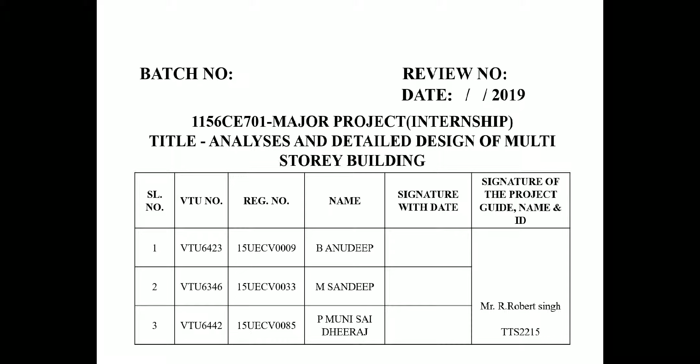The name of the project is Analysis and Detailed Design of Multi-Storey Building. The students are B Anudeep, M Sandeep, Muni Sai Dheeraj.

This is the abstract. The performance of a multi-story framed building during sturdy earthquake motions depends on the distribution of mass, stiffness, and strength in both the horizontal and vertical planes of the building. In multi-storied framed buildings, damage from earthquake ground motion generally initiates at locations of structural weaknesses present in the lateral load resisting frames.

In some cases, these weaknesses may be produced by discontinuities in stiffness, strength, or mass between adjoining stories. Such discontinuities between stories are often allied with sudden variation in the frame geometry along the height. A common type of discontinuity is vertical geometrical irregularity arising from the rapid drop of the height.

This work shows the performance and behavior of regular and vertical geometric irregular RCC framed structure under seismic motion. 5 types of building geometry are taken in this project: 1 regular frame and 4 irregular frames. A comparative study is made between all these building configurations, height-wise and bay-wise.

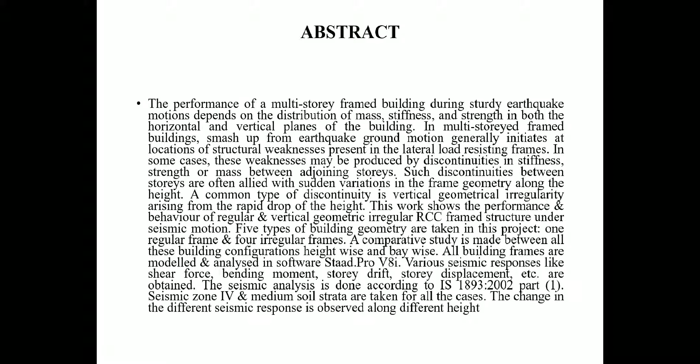All the building frames are modeled and analyzed in software StaadPro. Various seismic responses like shear force, bending moment, story drift, story displacement, etc. are obtained. The seismic analysis is done according to IS 1893-2002 Part 1. Seismic zone 4 and medium soil strata are taken for all the cases. The change in the different seismic response is observed along the different height.

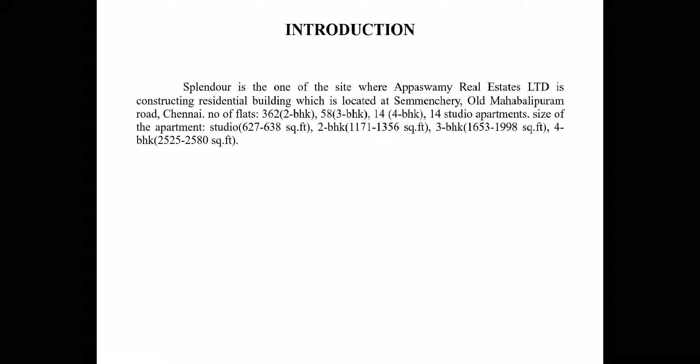Introduction. Splendour is one of the sites where Appaswamy Real Estates is constructing a residential building which is located at Semmenchery, OMR, Chennai.

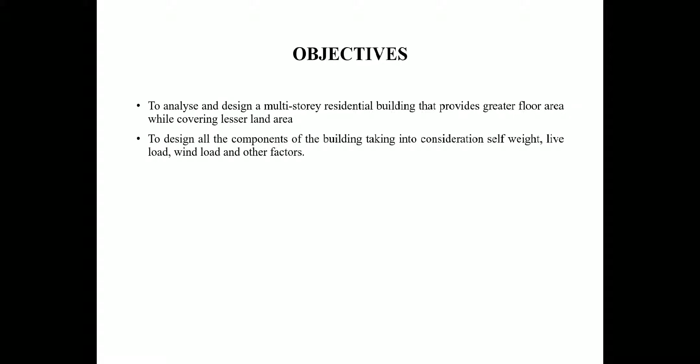Objectives of this project are to analyze and design a multi-story residential building that provides a greater floor area while covering lesser land area, and to design all the components of the building taking into consideration self-weight, live load, wind load and other factors. This is the methodology.

The methodology is as follows: drawing of a plan, load calculations, analysis of the building, design of the building, results and discussions, and finally conclusion.

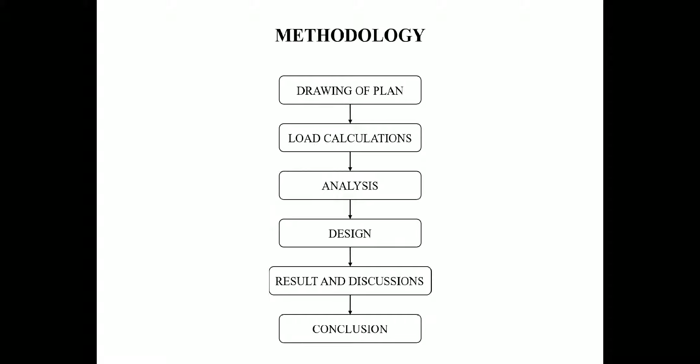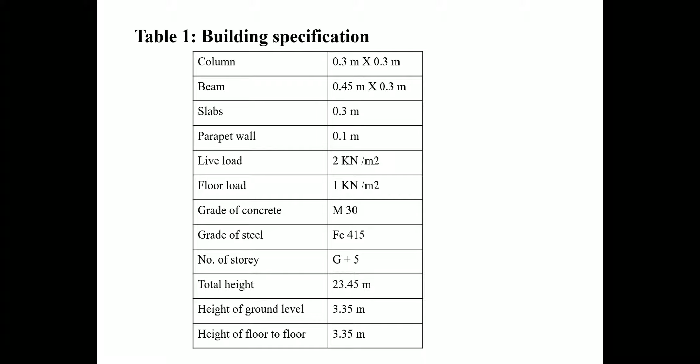These are the building specifications, which include the specifications of column, beam, slabs, parapet wall, live load, floor load, grade of concrete, grade of steel, number of stories, total height, height of ground level, and height of floor to floor.

This is the wind load calculation that we have done. The wind load calculation is based on IS 875 Part 3, 1987.

This has been calculated for a G+5 residential building located in Kandanchavadi, OMR, Chennai. These are the 3 factors: K1, the probability factor; K2, terrain height and structure size factor; and K3, the topography factor.

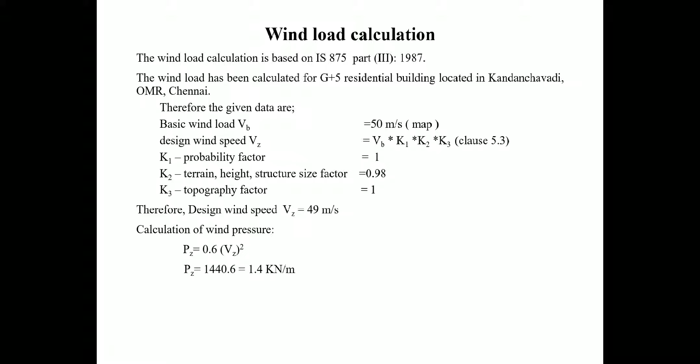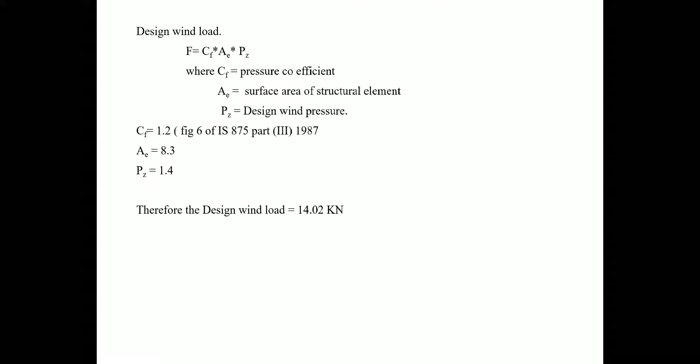Therefore, after calculating, we found that the design wind load is 14.02 kilonewton. Next, we come to the analysis.

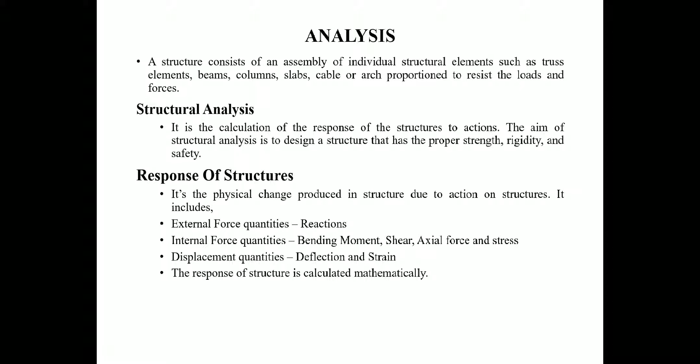These are the live loads acting. The primary loads are divided into live loads and dead loads.

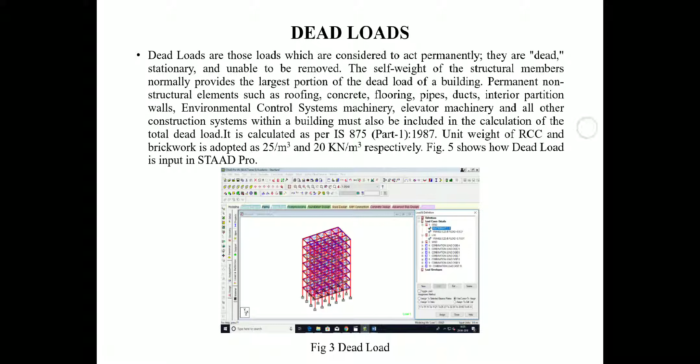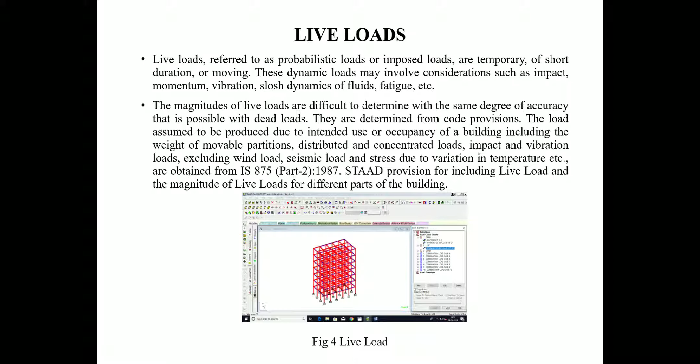Live load, referred to as probabilistic loads or imposed loads, are temporary, of short duration, or moving. These dynamic loads may involve considerations such as impact, momentum, vibration, slosh dynamics of fluids, fatigue, etc. The image represented here is of a live load in STAAD Pro.

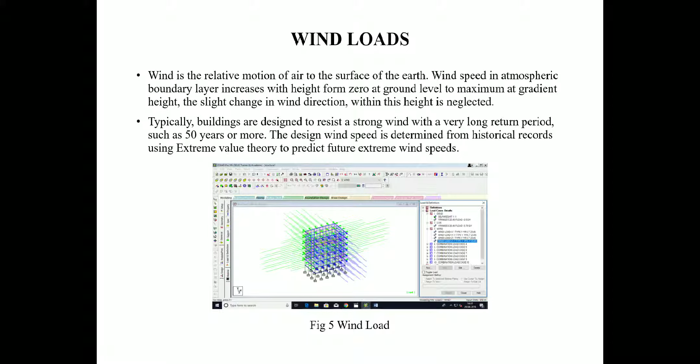Wind load is the relative motion of air to the surface of the earth. Wind speed in the atmospheric boundary layer increases with height from 0 at ground level to maximum at gradient height. A slight change in the wind direction within the height is neglected. The mentioned figure belongs to the wind load, which is represented in the STAAD Pro analysis program.

Next is the design of slab. We have designed the slab manually.

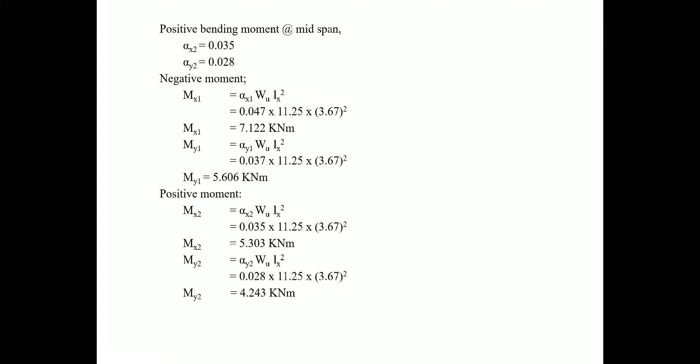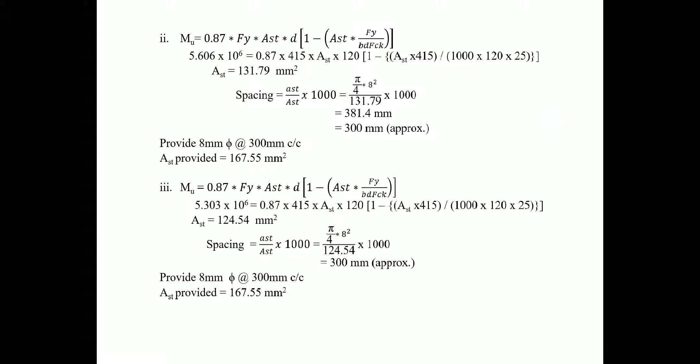Thus, here we can find that the design of slab is safe.

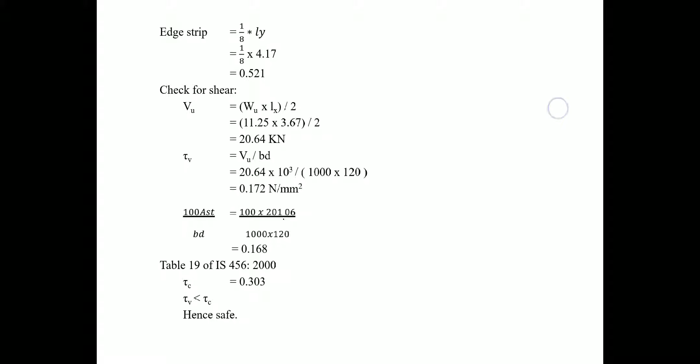Next is followed by the design of beam. Here is the given data.

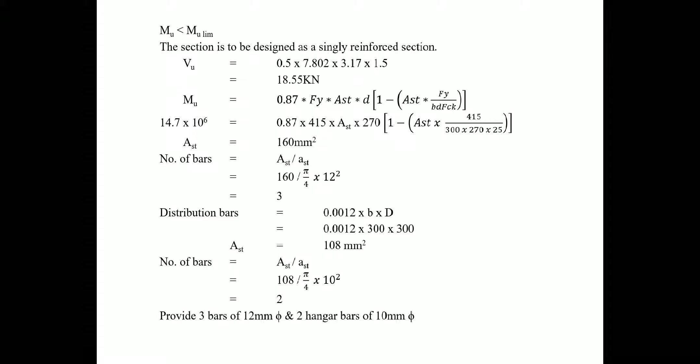Thus, from this, we can adopt nominal shear reinforcement using 8 mm diameter 2 leg stirrups at a spacing of 300 mm center to center.

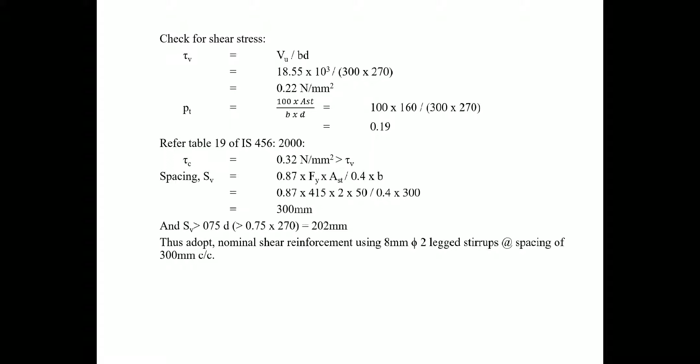Followed by the design of column. These are the data.

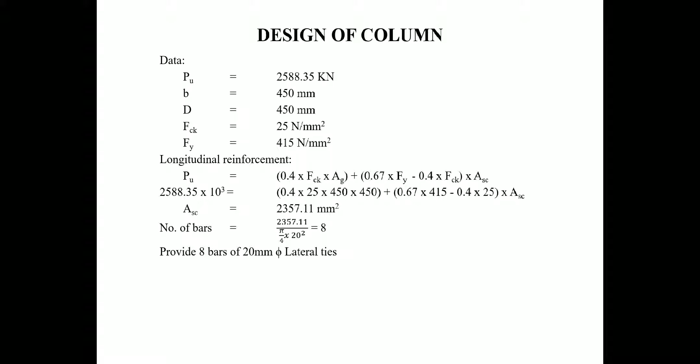Later, we come to the results and discussions of the STAAD design. The given figure describes the concrete design of beam number 86.

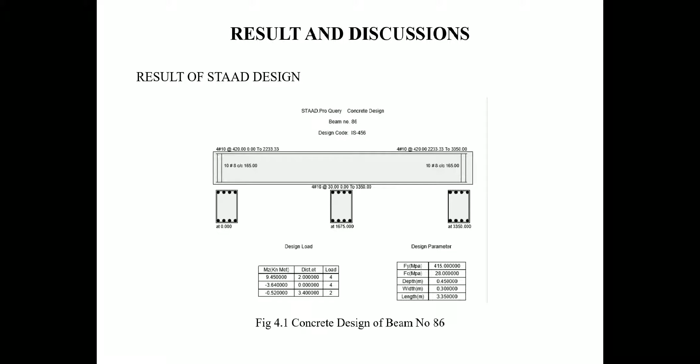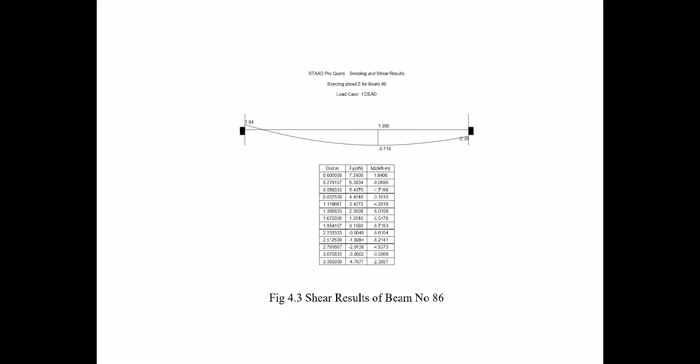Conclusion. Planning, analysis and design of a G+5 multi-story residential building was done. All the structural components were designed manually and detailed using AutoCAD. The analysis and design were done according to standard specifications using STAAD.Pro for static loads.

The dimensions of structural members are specified and loads such as dead load, live load and wind load are applied. Deflection and shear tests are checked for beams, columns and slab. The tests prove to be safe.

Both theoretical and practical work has been done. This project is mainly concentrated on the analysis and design of a multi-story residential building with possible cases of loadings using STAAD.Pro. Meeting the design challenges is described in a conceptual way.

We may also check the deflection of various members under the given loading combination. Further, in case of rectification, it is simple to change the values at the place where the error occurred, and the obtained results are generated in the output. Very little space is required for the storage of the data.

STAAD.Pro advanced software provides us a fast, efficient, easy to use and accurate platform for analyzing and designing structures.

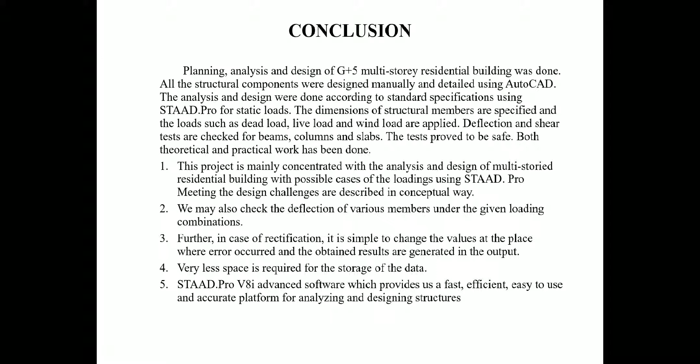Work at internship. The work at internship has been done at the Kandanchavadi site. This is regarding the pile work. The type of pile used at this site is driven cast-in-situ pile.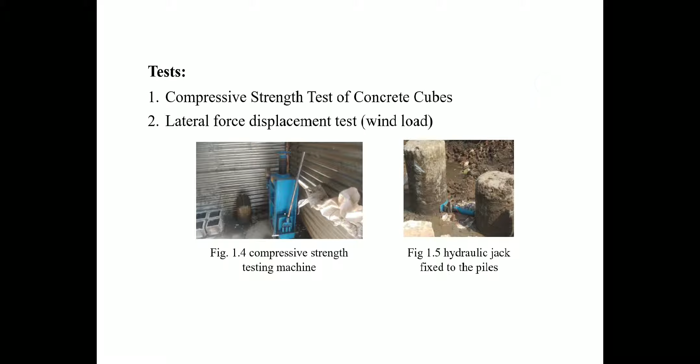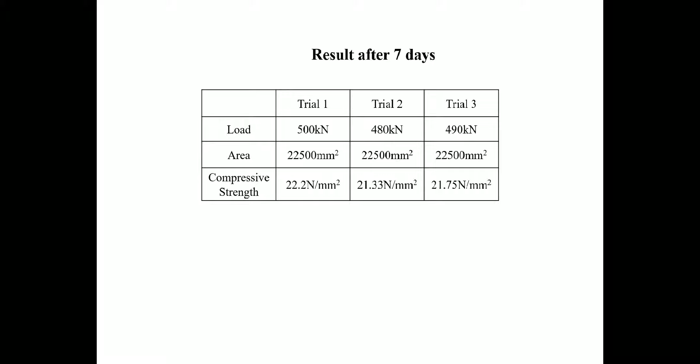Lateral force displacement test. It's a wind load test. This test is done to determine the wind load capacity of the building. It is followed by the procedure.

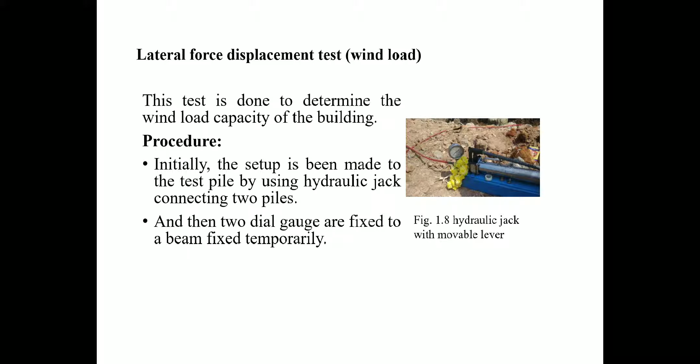In the figure is given the hydraulic jack with movable lever. Here you can notice the hydraulic jack fixed to the piles.

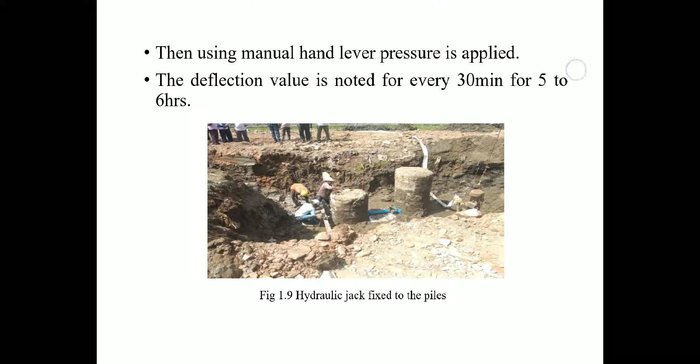Bar bending schedule. A bar bending schedule is a list of reinforcement bars for a given reinforced concrete work item, presented in tabular form for easy visual reference.

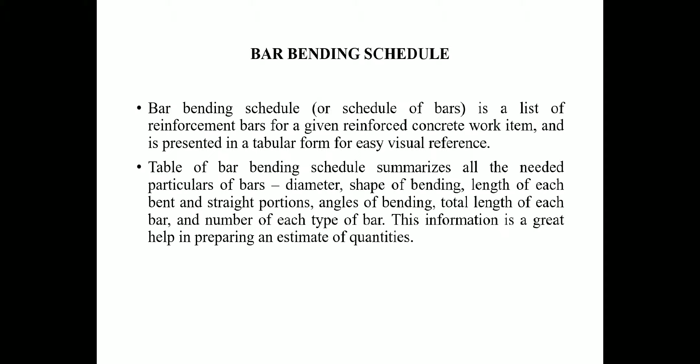These are the bar bending schedules for 2 grids that have been done by the students themselves for the entire slab.

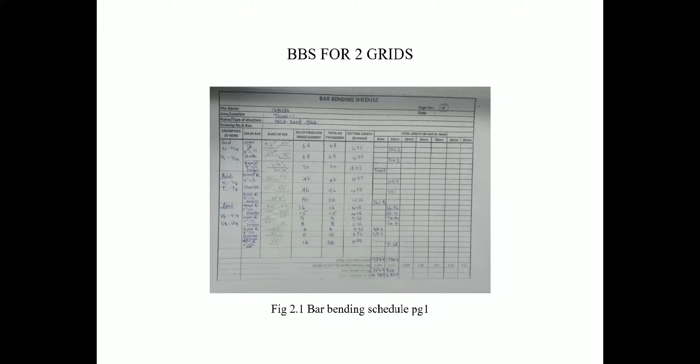Shuttering work. Shuttering is measured in surface area, and in SI units it is in square meters. The other way it is called shuttering area, and it can be calculated by measuring the area of contact of the shuttering surface with the concrete surface.

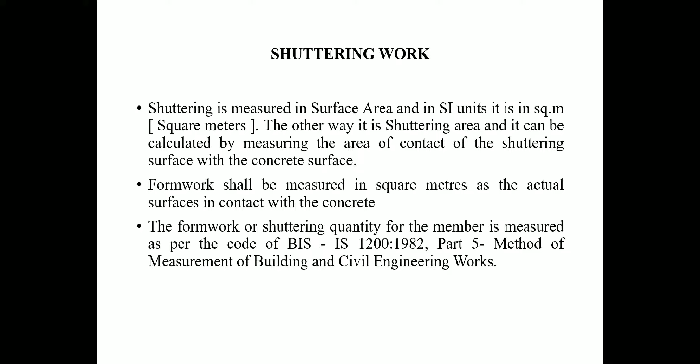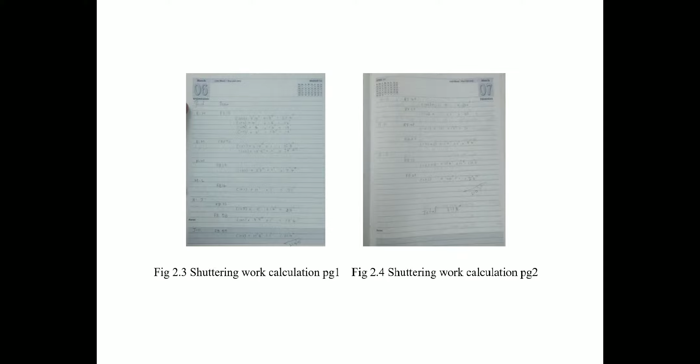The third is the block work calculation. Concrete blocks are an affordable building material that can be used for many construction projects and are suited very well for constructing walls for foundation or utility buildings.